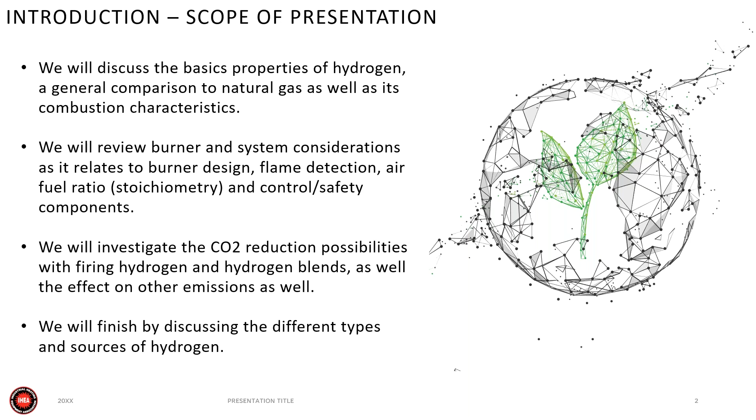So when we talk about hydrogen, and that's the potential being carbon-free, right? If we look at the basics, and I did not put the nitrogen in the air, but as we look at the chemistry of it, when we have natural gas, which is basically methane, CH4, we combine that with oxygen and we get CO2, water vapor, and energy out of that. When we look at hydrogen, you'll see there's no carbon in hydrogen. So we really just take that hydrogen, it combines with the oxygen, and we produce water vapor and energy. So there's that potential. When we look at that hydrogen possibly being produced with a renewable energy source, that hydrogen as an energy carrier results in a CO2 neutral energy form.

So there's a lot of talk, as we have throughout this series discussed, of investigating ways to decarbonize and reduce our carbon footprint on our thermal processes.

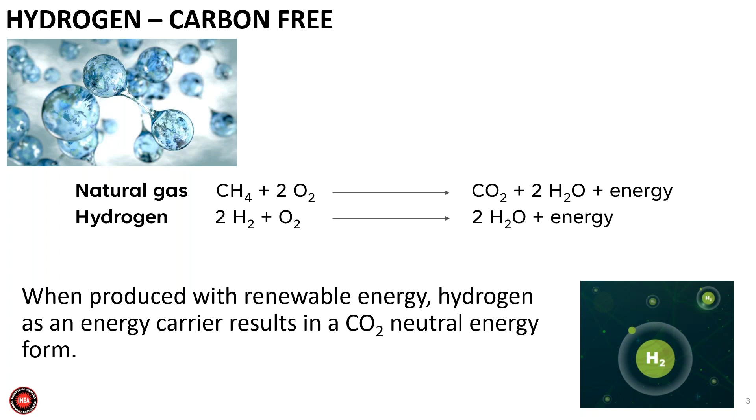So a little bit about hydrogen properties and combustion characteristics. The hydrogen atom is the lightest and smallest element in that periodic table. So there we've got one. It's 8 times lighter than natural gas. Hydrogen is colorless, odorless, and tasteless. So why is that important? Well, if we compare it to natural gas, it's a smaller molecule, so it would have more possibilities of leakage. Certainly that lighter atom is going to affect the characteristics of it flowing through pipes, valves, things of that nature. So why is that important?

Well, that's why most of us combustion component manufacturers are testing hydrogen on our burners. We're internally certifying it, that all our control components, our shutoff valves, all those components are suitable for 100% hydrogen, so that we have a sustainable system that is safe to operate and has no issues going forward with meeting all those safety components that we have on our checklist when we're building a combustion system or a thermal process solution.

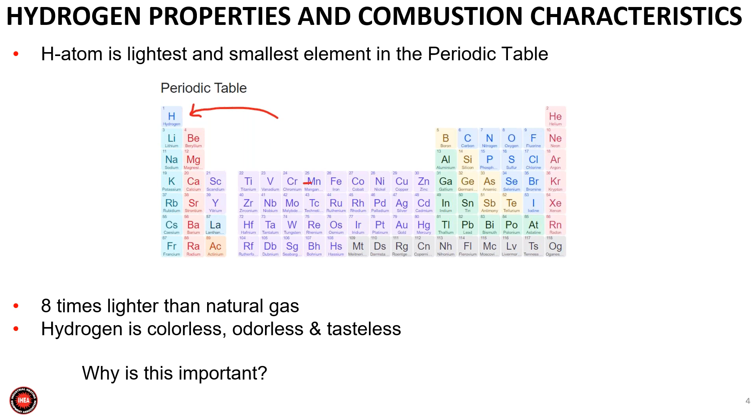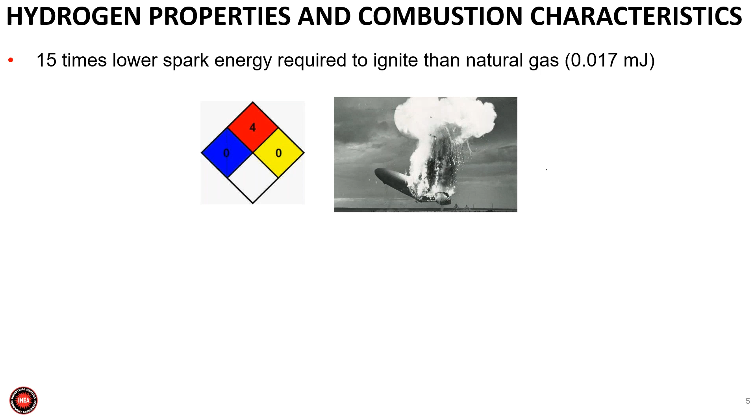Hydrogen requires 15 times lower spark energy to ignite than natural gas, and it has an extremely wide flammability range. From a combustion standpoint, it's very easy to light. That wide flammability range, shown in the green bar comparing hydrogen, natural gas and air, goes from a lower to upper explosive limit of about 5 to 15% for natural gas, where hydrogen is about 4 to 75%. So hydrogen is very easy to light.

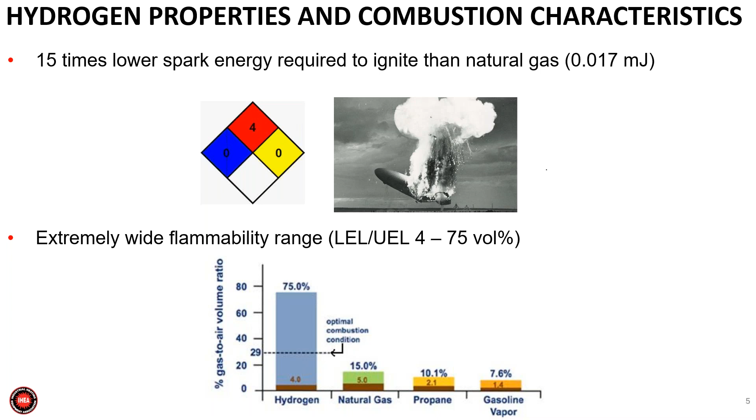So if we have some fuels that are a little diluted, but there's some hydrogen in there, from a combustion standpoint that's helping us maintain combustion within the burner itself.

One thing to note though is that flame, depending on the design of the burner and how it's introduced, burns 5 to 8 times faster than natural gas, and it results in a higher flame temperature, about 400 to 500 degrees higher. So as we look at this picture, a burner-stabilized flame in this vessel is what we call a nozzle mix burner.

The fuel and air is delivered to whatever nozzle mixing device, and that flame stays stable on that burner stabilization device, the nozzle. With hydrogen, you have a greater propensity to flash back. Because that flame speed is so much higher, it has the potential, if there's air mixed with that fuel—and we'll talk about some burner types—it has more of a chance of flashing back.

So that's a safety design concern—I'd say a burner concern—that we are flashing back. The heating value of pure hydrogen is about 3 to 3.5 times lower by volume than most commercial natural gases, approximately 325 BTUs per cubic foot. That just means equivalency-wise, we're going to need about 3 to 3.5 times more volume of hydrogen to get our equivalent capacity through the burner compared to burning natural gas.

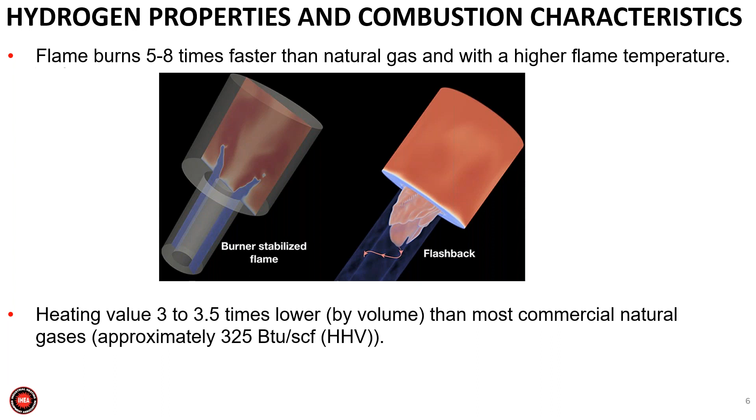And we'll talk about how that affects the stoichiometry and the pressure required at the burner in a couple slides. So when we look at burner challenges in firing hydrogen: the flame temperature is about 400 to 500 degrees hotter than natural gas, so on the left here we have the possibility of overheating burner parts, and that flame stability and flashback possibility. Those parameters involve flame speed, the flammability limits we just talked about, flame temperature, and really it goes to burner design.

Again, here our image shows a natural gas flame versus a hydrogen flame—when the pressures in a burner get lower, that higher flame speed increases the availability of the burner flashing back.

So what are our solutions from a burner side? We actually have burners that require no modifications to burn either natural gas or hydrogen. Or we look at slight modifications and material changes to make sure the increased flame temperature won't wear out burner parts—if something's cast iron, we go to stainless. We look at slight modifications of a nozzle to accommodate that higher flame speed so we don't have issues in the future, because we want our burners to last just as long on hydrogen as they do on natural gas. Or a solution is to limit the amount of hydrogen, but that also limits your availability to decrease carbon.

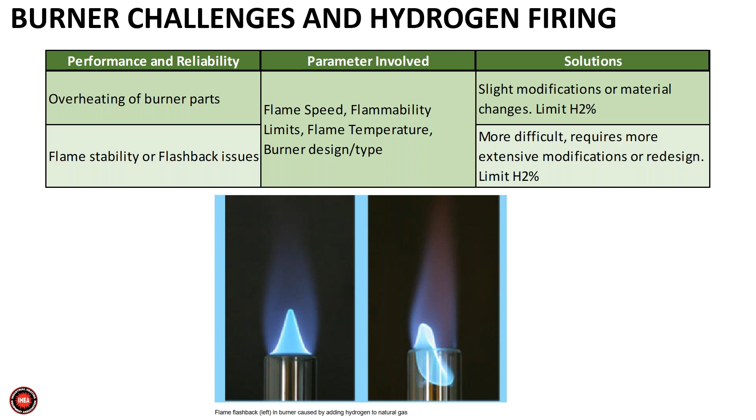Ignition stop behavior—what we mean is the effects causing flashbacks. When we start and stop a burner on natural gas, that flammability range we talked about is pretty narrow compared to hydrogen. As we said, hydrogen is very easy to light, but when we start and stop a burner, we sometimes have to adapt that light-off capacity.

Purge with inert gases—when we start and stop burners, depending on whether you're burning natural gas or hydrogen, we either purge with an inert gas like nitrogen, or stop with natural gas. We also look at shutoff valve placement to make sure there's not a lot of volume in the gas pipe from the last shutoff valve to the burner, and possibly use check valves.

And we do that because if there's hydrogen in that line and you've got air, you can have that air and hydrogen mix a little bit together depending on the orientation of your piping. And when you start that burner on pure hydrogen, you've stopped it and go back to start, you can have a small or sometimes big pops when you go to light the burner. Not many people like their system popping. Big bangs don't go well in plants. So when we're looking at that system design, depending on capacity and the size of the piping and the burner, we look at possible solutions to make sure that start, stop, and ignition behavior is very similar to what you would experience on natural gas or any other fuel.

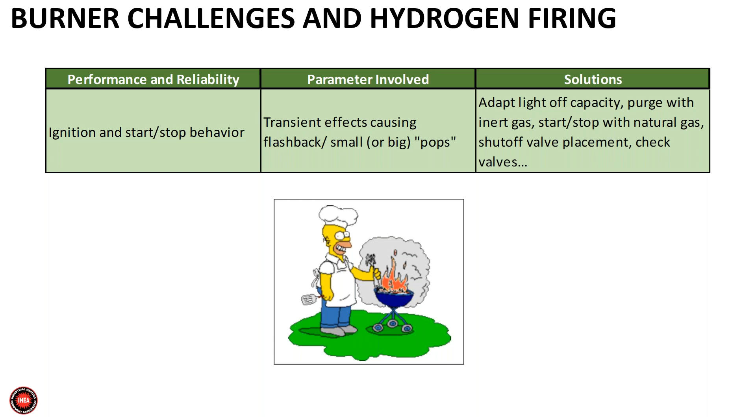Flame sensing. So when we look at flame sensing, scanners or flame rods, ionization, we start getting above 80 to 90% hydrogen in a mixture of natural gas, and that flame rod will no longer have an adequate signal to keep your flame safety locked in, just because of the reduction in carbon, and you'll see what the flame looks like. There's just that lack of carbon. So pretty much UV scanners, we've tested them, and up to 100% firing hydrogen is no problem.

And what we've seen in some of the burner designs that Honeywell has is that, depending on the mixing and the design of that burner, because of that higher flame speed of hydrogen, we've had some resonance effects in some burners. So that's combustion dynamics involved, the mixing principle. So really the solutions there are some modification of parts and internals, also limiting hydrogen. We've seen that, but again, really the challenge, or the goal I should say, is to be able to run those systems on 100% hydrogen to offer that capability of eliminating that CO2 or that carbon from your products of combustion.

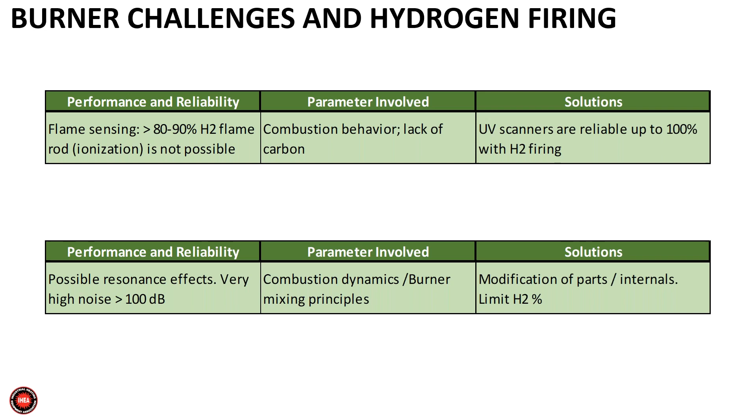And with looking at flame properties, the geometry, the radiation, pretty much those parameters involved are all combustion parameters. But our experience of many of the burners we've tested in our labs is there's no significant difference in flame geometry. At some mixtures, in some burners, you'll see a slight decrease in flame length, in some mixtures of hydrogen, and we've got a little video coming up probably in the next slide to show what the differences in flame appearance are.

You'll see here on the left is one of our total air duct burners. You'll see 100% natural gas, that usual blue flame, and then a very different looking flame on 100% hydrogen. It's a little more opaque, and in a hot furnace you could barely see it. That goes for natural gas as well. The same challenges years and years ago, oil was the preferred fuel available to use in our combustion systems. When we switch to natural gas, it doesn't have as much radiation coming from the flame as oil, so that changed some people's design. Hydrogen is a little less radiation than natural gas. So it's just things that will be considered down the road in some of our furnace and oven designs that we have with our customers out there.

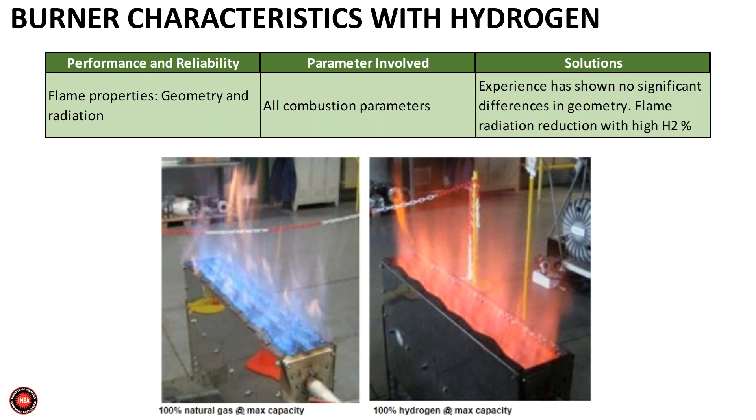So what we see here is a high velocity burner burning 100% natural gas. In a few seconds, we'll start adding the hydrogen, but it's your typical high velocity blue pencil-like flame coming out of a high velocity burner. You'll see up in the upper left there, our hydrogen increasing a percentage at a time pretty fast. At 25%, there's really no change noted. Even at 50%, you might start seeing that flame come back a little bit, but it's still blue. That carbon's still in there. And until we start getting up about 75 to 80%, that's when you'll start seeing your flame change in color.

And then about 90%, we go to that very opaque orange-looking flame. So you can see that it's a little more opaque. Certainly the radiation's decreased. But in a lot of our systems these days with high velocity burners for ceramics and heat treating, we depend on that high velocity, which you'll get with hydrogen as well. There's no change there in the velocity out of the burner. Actually, with an increased flame temperature, you might actually get a little more velocity burning with 100% or some percentages of hydrogen.

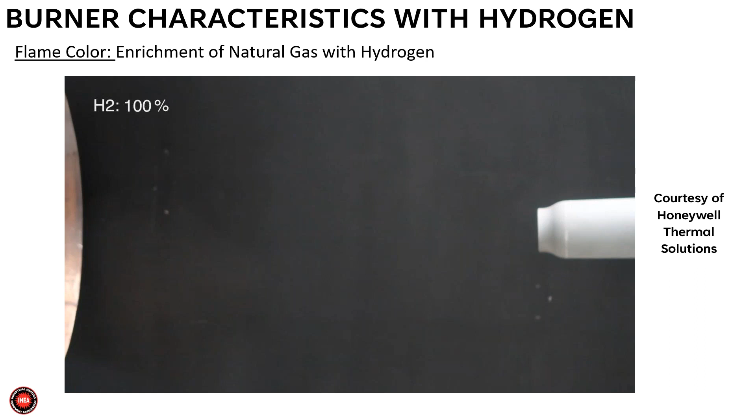So we had talked about the pressure requirements and the combustion air requirements. It's a bit of an eye chart, so I'll step through it slowly. The required pressure at the burner, if there's not a great deal of modification, will be higher with hydrogen compared to natural gas to achieve that same capacity. We need about 3 to 3.5 times more volume.

On the chart, the dashed red line is fuel pressure and the purple line is fuel flow, referenced to natural gas values. Our x-axis is the hydrogen content in a natural gas blend, 0 to 100%. The left axis is relative fuel flow and pressure of air, and fuel flow and pressure on the right. As we increase the percentage of hydrogen, our fuel flow needs to increase to maintain that capacity on natural gas. At 50%, even up to 100%, there's our 3 to 3.5 times fuel flow required.

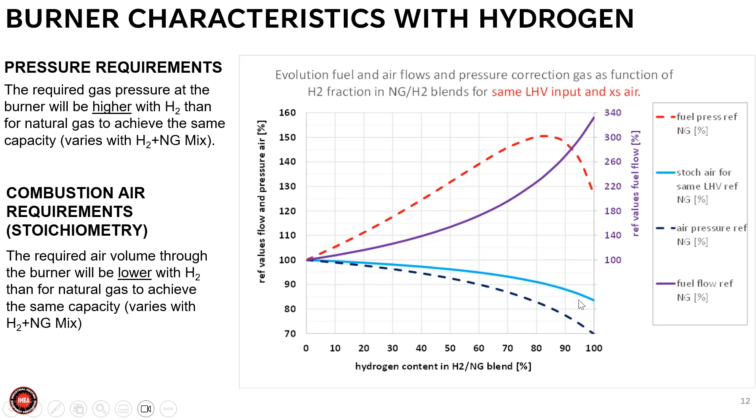When we talk burner control firing hydrogen or blends - firing 100% hydrogen, very similar control methods can be used as with natural gas, whether air and gas control valves, linkage, parallel positioning systems, or ratio regulators - those components have been tested to make sure they're suitable on hydrogen. They'll control, we have to look at volume through the device, but with that lower density, the increase in pressure drop isn't as severe as you'd think, even requiring more than 3 times the volume versus natural gas.

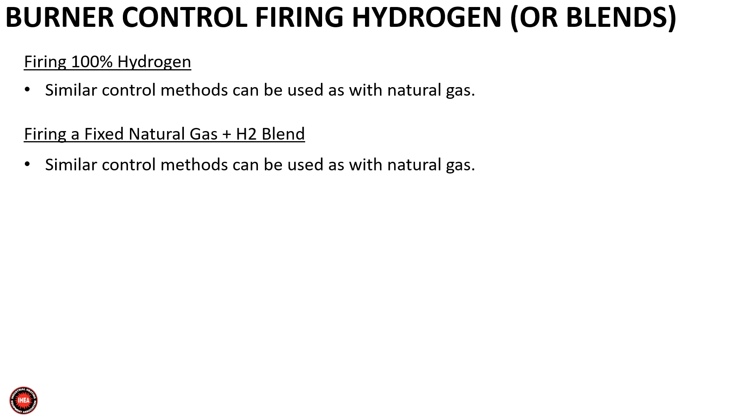Firing a fixed natural gas and hydrogen blend, same thing - similar control methods to natural gas. This makes control much more difficult when you have a variable hydrogen blend in your natural gas while the burner's operating. That variable blend will have an effect on the possible maximum capacity of the system and the air fuel ratio.

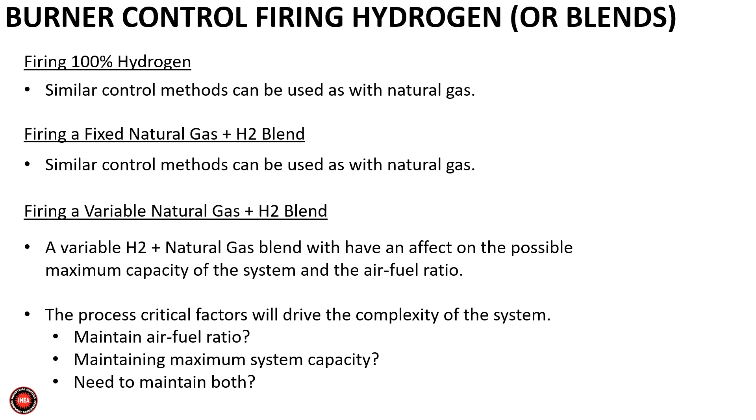So when we look at that possibility, what are the critical factors driving complexity of the system - especially controlling - is it more critical to maintain an air fuel ratio, excess air, to maintain maximum system capacity, or do you need to maintain both? The more complex you get, the more complex your system will be to maintain those factors. And again, if you need to maintain the same capacity, how does that affect the other factors in the system?

So looking at the requirements for flows and pressures, the air factor or excess air, when we increase the hydrogen in the natural gas blend - our bottom line here is that capacity, we're holding the capacity of the burner system. What happens is when we hold that capacity, you'll see that air factor, that percentage excess air, goes up as we have increasing hydrogen.

As we mentioned, the stoichiometric requirement for air is less with hydrogen. So when we maintain the same capacity and the air is not changed, our excess air goes up in the system. That's really what this chart is showing - percentage excess air is going to increase if we maintain that same capacity, and no other adjustments in the system are being introduced to hold that excess air.

This should be no problem if we look at low temperature applications, line burners, duct burners, things of that nature. Generally excess air is not a problem because those systems are already operating at extremely high excess air oxygen levels to dry or do other things at a couple hundred degrees Fahrenheit. When that excess air is important, this type of system really is not going to be a good solution.

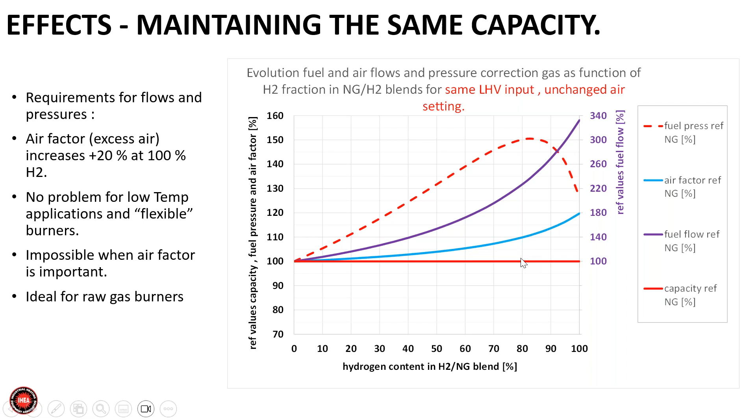We list here that this is ideal for raw gas burners, right - just maintaining your input to get to a certain set point in your air temperature when you're air heating.

When we look at maintaining that same air fuel ratio, what you'll see is we now are maintaining that air factor, that excess air. So what happens here is when we held that capacity constant, our excess air went up. When we hold that excess air constant, our capacity will go up.

Because we're holding that X percent of excess air, the capacity is not checked, not adjusted with that fixed air. Again, we can't get into it today, but it comes back to the system design, right? It's much easier to design a system when we have fixed hydrogen and natural gas blends than something that can vary.

This type of control is okay if it's compensated by the capacity control of the installation. So in most installations, a thermocouple is driving control. So if the capacity rises, the maximum capacity in the burner rises a little bit, it's just going to maybe heat things up a little quicker.

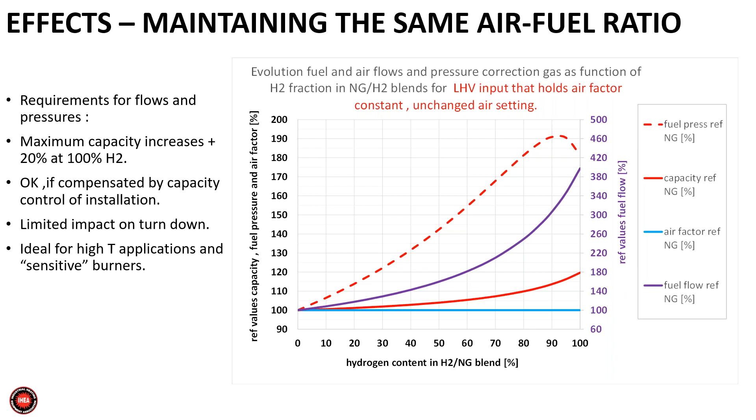So that's all the talk, right? CO2 reduction with hydrogen. 100% hydrogen combustion, no carbon in your fuel, so your resulting CO2 should be zero.

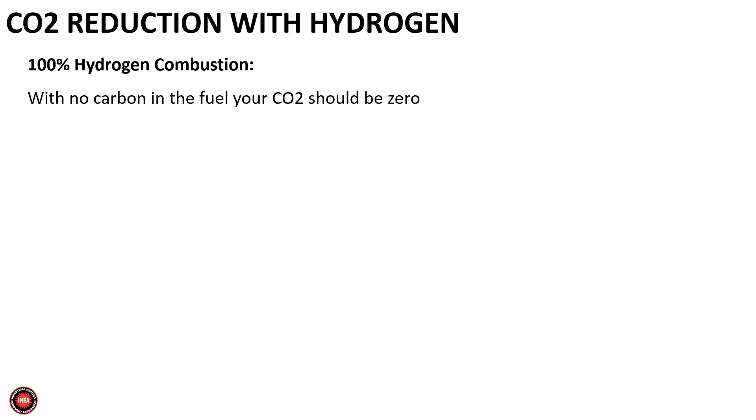When we look at that CO2 reduction with blending hydrogen and natural gas, obviously we're displacing that CH4, that methane in the natural gas, with hydrogen or a carbon-free fuel. But when we have a chart that shows the CO2 reduction as we start increasing that percentage of hydrogen in the mixture, it's not a one-to-one or direct correlation to the amount of CO2 reduction you're going to get with the percentage of hydrogen in that natural gas hydrogen blend.

So this results in the hydrogen lowering the heating value of that mixture, and with its low density, you'll see in the next slide, to really realize a 50% reduction in CO2, you're going to need almost 80% hydrogen in your hydrogen natural gas blend.

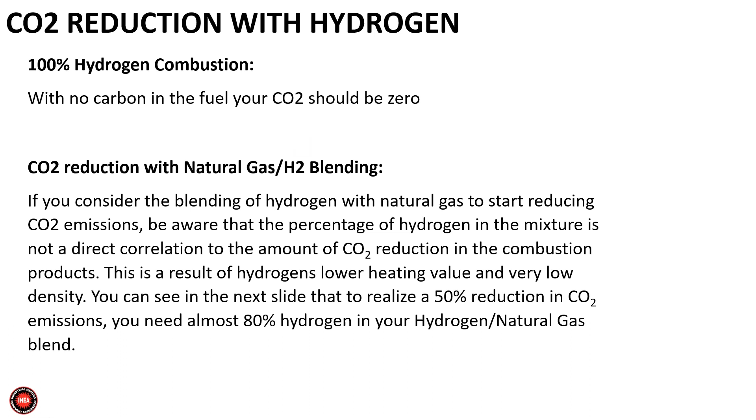So what this chart shows is it's not one-to-one, right? Just because we have 50% by volume, and this is the key, right? Because it's a lower heating value, but it's also much lighter. So by volume, if we have a 50% hydrogen natural gas mix, our CO2 reduction is a little over about 21 to 22%. So you'll see where looking at that 50% CO2 reduction takes you to about 78%, 80% hydrogen in your natural gas.

So that's something to be aware of, because there's a lot of discussion of blending, injecting hydrogen into natural gas grids up to like 17 or 20%. But a 20% hydrogen blend is going to get you about 6% CO2 reduction, which, hey, everything we can do to reduce CO2 is a good thing.

But it's just something to be aware of, the nature of the hydrogen, because if it's lower heating value and that lower density, by volume it's going to take a bit of hydrogen to get a more significant reduction in your CO2 output.

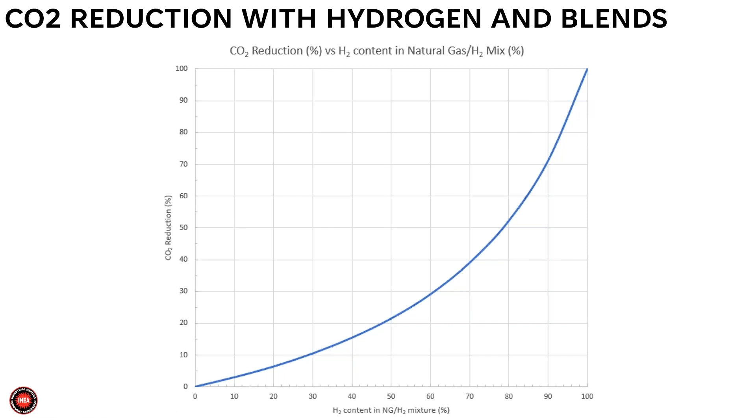So we talk about other burner emissions. CO2 is important, but for a long time in our industry, there's been legislated NOx requirements for different applications, right? California being one of the most stringent, but we're seeing more and more requests for lower and lower NOx burners.

Impact of hydrogen on NOx. In our traditional burners that we're doing testing on now, we do see volumetric NOx levels increasing as that hydrogen percentage increases in the gas mixtures. And that's resulting pretty much from that increase in flame temperature. There's no way of getting around those physics.

But something to note is that by this volumetric reference and measurement, most plants would have a tons per year, some type of measurement. ppm is a very convenient way of measuring NOx. CO2 is generally in percentages, your CO, but it can be misleading because of that change in the volume of the products of combustion and other corrections when we're looking at firing hydrogen. So the volumetric comparison should be avoided, and more of a mass per unit energy is recommended.

Compare NOx from natural gas versus hydrogen combustion, and we'll show you an example of that, because most burners with turn down, that volumetric measurement of especially NOx generally increases in most burners.

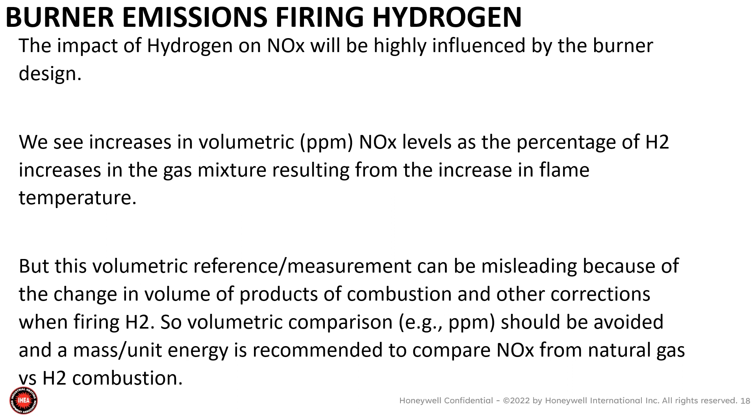And as I had said before, the techniques we've used for many, many years to reduce NOx, that's the use of excess air or swirl in a burner or some premix, don't agree well with hydrogen because of that higher flame speed. So it's a challenge to us burner manufacturers when we start looking and talking the next generation burners that can be fuel flexible and be low NOx, whatever fuel we're burning, right?

So that burner mixing design definitely influences the hydrogen impact on NOx. As I had said, some burner designs will not work, or may be very challenging.

What we've seen is that NOx increases as we test different blends of hydrogen, but above 70% we see a notable shift and increase in NOx starting to happen. And resulting by volume, that's probably when we're starting to see our most significant shift in flame temperature as well. As I said, that volumetric measurement should be avoided.

And then what about CO, right? If we have a pure hydrogen fuel going through a burner, there should be no CO, so there's no carbon.

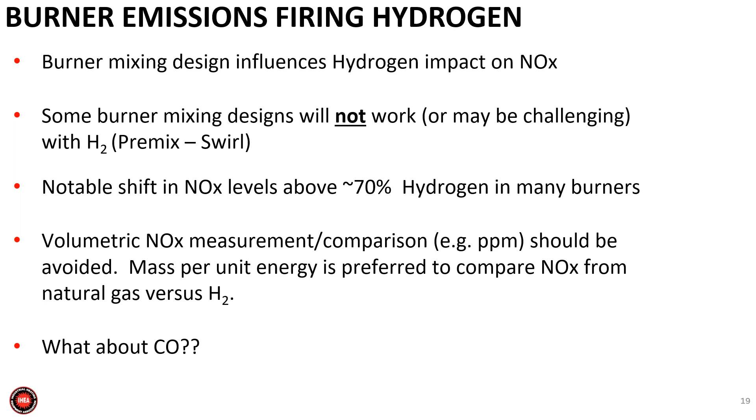Also to be noted, obviously, we're now with the reduction in CO2 and the introduction of a pure H2 source, we're combining with the oxygen, so we have some more moisture in the flue gases as well.

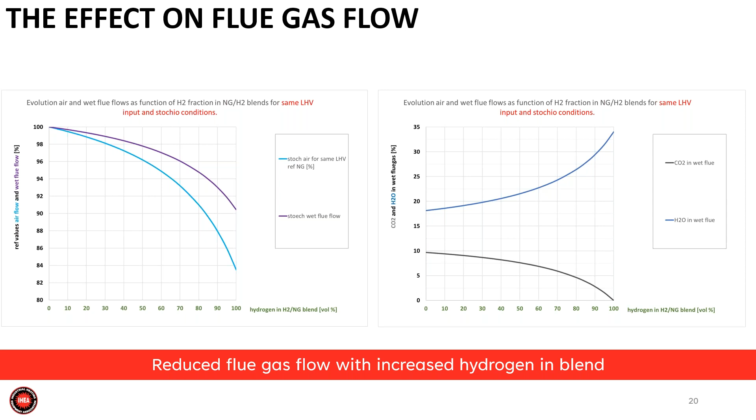And many of our customers are testing these blends, and even pure hydrogen, with their materials that they're heating, to make sure that in a situation where they would have the opportunity to burn hydrogen, they're not going to see any product quality differences. So we've got that reduced flue gas flow with that increased hydrogen blend.

So just to put some numbers to it, when we're looking at the NOx generated, if it's 50 ppm corrected to 3% oxygen, that correlates to about 0.06 pounds per million BTU. If we look at that same volumetric level, that 50 ppm at 3% O2 actually correlates to 0.041 pounds per million when we're looking at combusting pure hydrogen.

That is a combination of the heating value of the fuel, its density, but also mainly that reduction in the flue gas. So it's important to note that, to be in the same pounds per million, or that mass per energy basis, with hydrogen as with natural gas, that conversion of that 0.06 pounds per million actually correlates to about 73 ppm corrected to 3% for pure hydrogen firing.

So it's something to be noted, and it may be something in the future that the environmental agencies are going to have to recognize, that there's a difference here when you're burning hydrogen or even percentages of hydrogen, and something's been guaranteed on an emissions level on a parts per million or a volumetric basis, and to go back to something that would be...

More universal in terms of that mass per energy basis, that pounds per million, to make sure that you're in compliance, because this relates to the pounds per million, that's that energy, and this is a direct weight of the NOx that's going into the atmosphere. So it makes a difference.

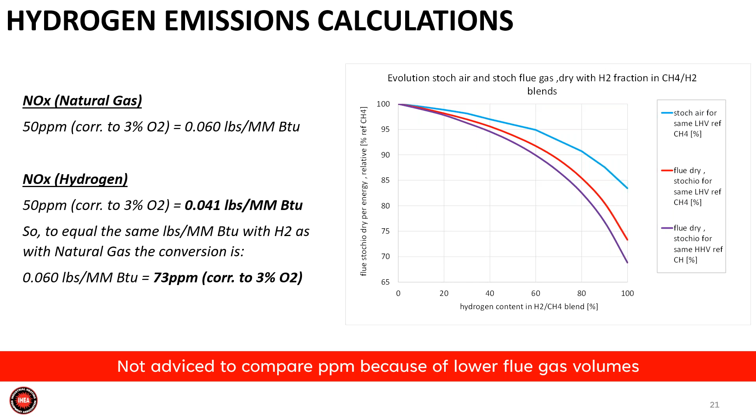90+% of our hydrogen that's available on the market today is gray hydrogen, and that's generated from steam methane reforming. Most of it's in your oil and gas, your refineries, and it's by far the most common method today. And it's a byproduct, right? They've been using hydrogen in refineries as fuel because it's a byproduct, so they utilize it to heat many of their processes.

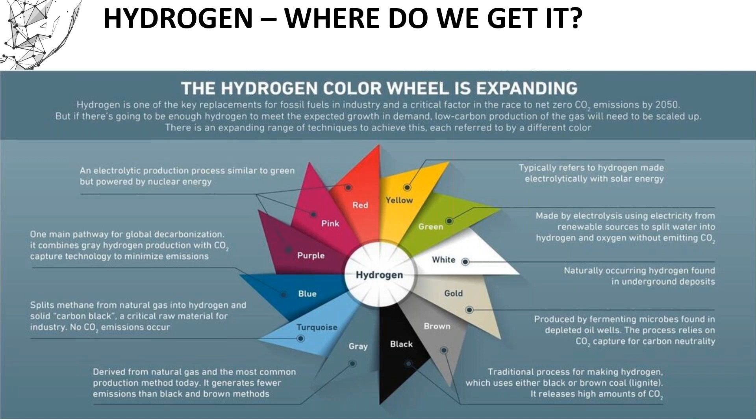All of these have a cost as well, right? Gray hydrogen is going to be your cheapest, because as you start looking at removing the CO2 from the existing gray hydrogen or green hydrogen, the power is going to be more expensive. So over time, just like everything else, economies of scale and the ability to mass produce this fuel will have an effect on its price.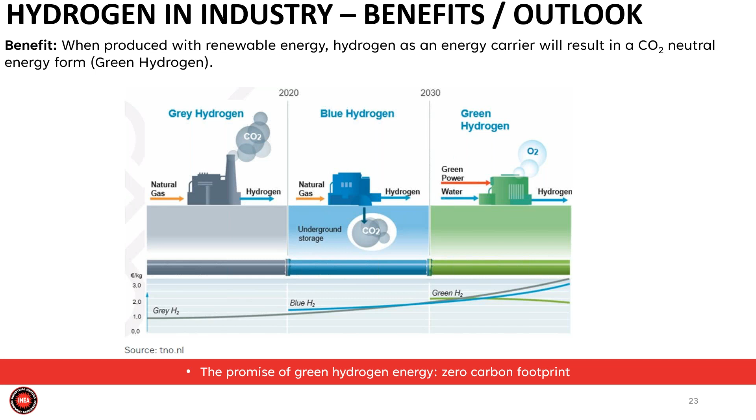And as we look at those renewable energy sources too, I had mentioned that the most economic way to distribute hydrogen is maybe to mix it into existing natural gas grids. We have to look at the grids. Does the substructure exist? Some studies say that blending up to 17 or 20% is acceptable without changes to the distribution network, and maybe minimal changes to appliances, say household furnaces, stoves, maybe commercial boilers.

But as I said, there's a lot of burners that have been developed out there that use techniques that may not agree with hydrogen. I can tell you that some of the burners that Honeywell makes right now in their existing format, there are a few that are not compatible. We do not endorse any hydrogen being mixed because of some of the overheating issues we can get into.

What we'll see in the future, maybe local small-scale hydrogen distribution, may go up to 100%. Longer term, higher levels of hydrogen will be targeted. This is going to take time.

And on-site production, there's going to be some people there. There's plenty of companies that have electrolyzers, and they're getting larger and larger. Then it's going to be what's the energy source and what's required for your particular production facility, what type of volume we have to produce to be able to run that facility consistently on 100% hydrogen.

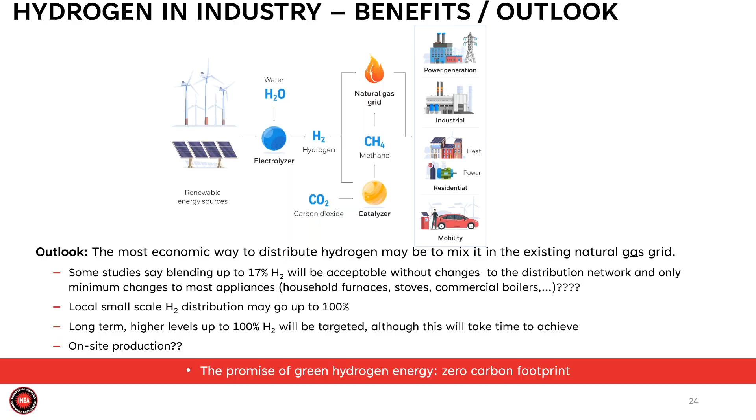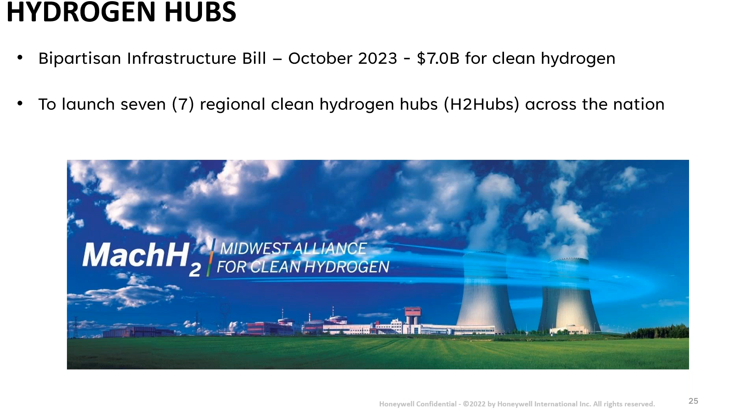Last year, it was a bipartisan infrastructure bill. October last year, $7 billion was released for the production or the future of clean hydrogen. This is to launch 7 regional clean hydrogen hubs across the nation.

Those locations are, you've got the Appalachian hub, that's in the West Virginia, Ohio, Pennsylvania area, California, the Gulf Coast region, what they call the Heartland, which is your Minnesota, North Dakota, South Dakota. The Mid-Atlantic is your Pennsylvania, Delaware, New Jersey. The Midwest, your Illinois, Indiana, Michigan areas, and then the Pacific Northwest, Washington, Oregon, Montana. All these are targeting to be hubs and to have considerable capabilities of producing and then being able to distribute the hydrogen.